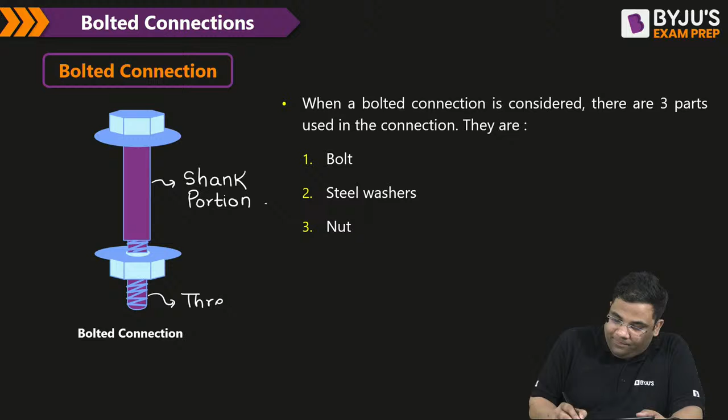This is known as the threaded portion. This is known as the head of the bolt. And you can see that below the head, here we have the washers. They are known as the washers. And then we have this nut.

So how is bolting done? Very simple. Suppose we have two members like this. So what we do? First of all, we'll make a hole and then we'll place the bolt like this. This will be your shank portion, and then it will be the threaded portion. Okay, and then this is the head. Then here we'll place the washer first. This is the washer.

This is to hold the members, and then we will place the nut and tighten it. So this is a typical bolt. Now first of all, let us see some specifications about the bolt.

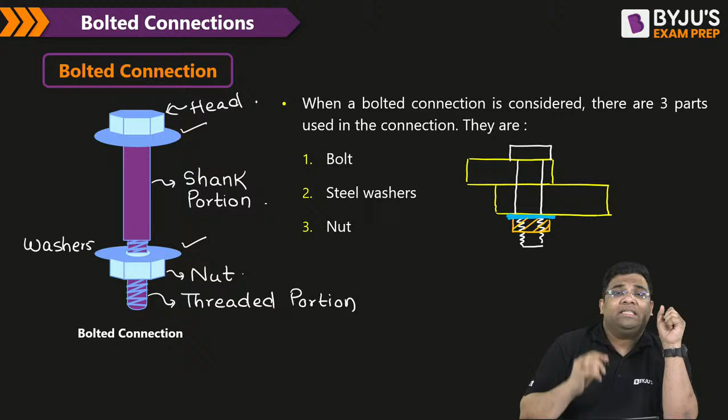Let us see some specifications about the bolt. The first specification is the grade of bolt. When we are writing grade of bolt, it is expressed in this manner, either like 4.6 or 8.8, something like this.

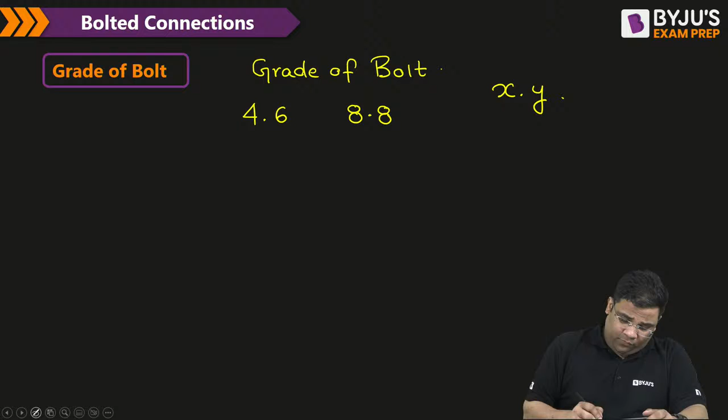Now this is in the format x dot y. Now what this x is, what this y is, let us understand. If you multiply 100 to this x, we will get the ultimate strength of bolt.

Now bolts are prepared from steel. And we know that if we draw the stress versus strain curve of steel, then we get a curve something like this. Initially there will be a straight portion and then something like this. This is the stress versus strain curve of steel.

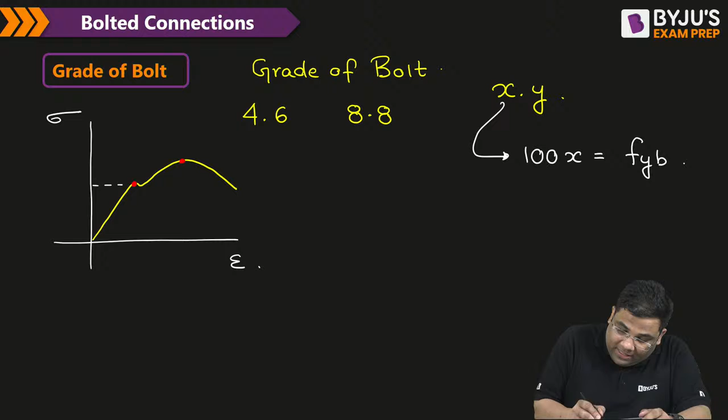Here you can see we have two important points. One point is this, one point is this. Now this point is the yield stress. And this point is the ultimate stress.

So this is, I can say, what will Fy be? I can say this is the yield stress, or I can say yield strength. You can say this is the yield strength of bolt, FYB.

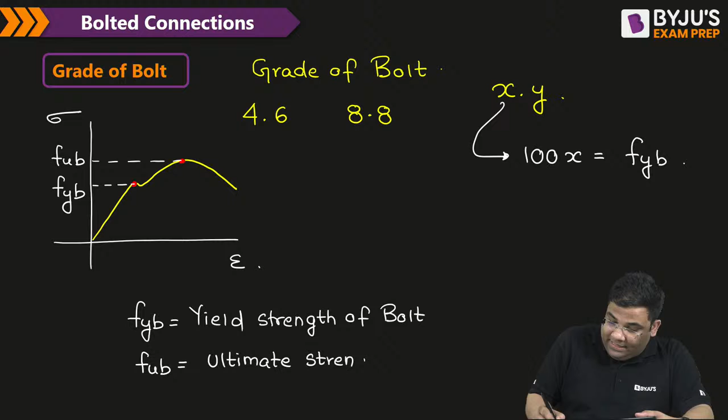And what is FUB? FUB will be the ultimate strength of bolt. So if you multiply 100 with x, we get FUB. This x indicates a number. When you multiply it by 100, you get the ultimate strength of bolt.

So tell me, when I am telling 4.6 grade, what is the ultimate strength of this bolt? Can somebody tell me? Can you mention in the comment section what will be the ultimate strength of this bolt? FUB, when it is written 4.6, tell me, what will be your answer?

Yes, it is 400. You see, in this 4.6, we can say x is 4. So what you do? 4 into 100 gives me 400 Newton per mm square. This is the way we find out the ultimate strength of a bolt from its grade.

Now, what does this 0.6 indicate? Let us understand. This point y is the ratio of the yield strength of bolt and the ultimate strength of bolt. So when I write point y, it is the ratio of yield strength of bolt and ultimate strength of bolt.

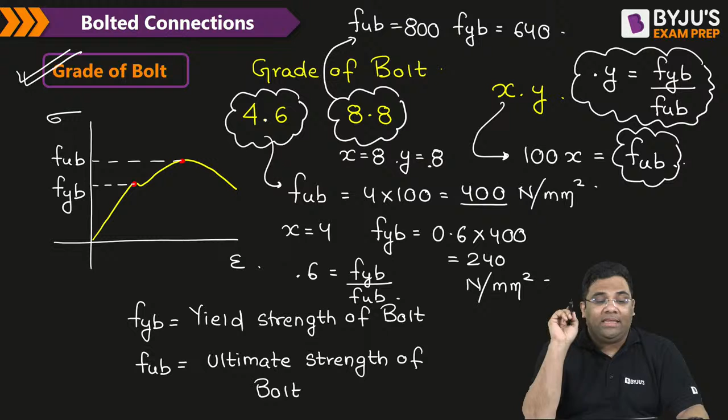Very good. Next thing is the diameter of a bolt. Here you see, we have seen that this is the shank portion and this is the threaded portion. The shank portion is also known as the gross portion, the gross area, and this threaded portion is known as net area.

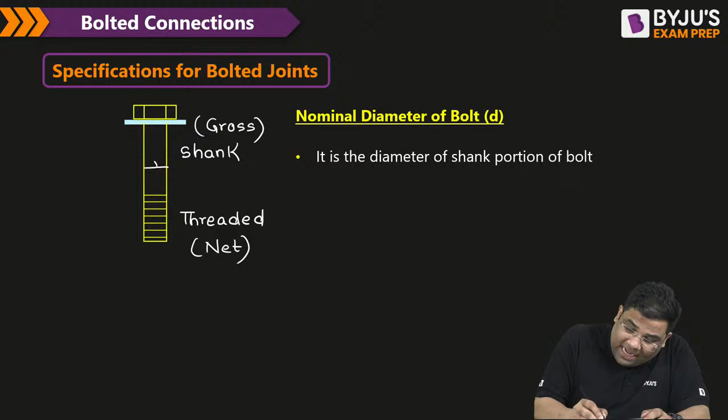The nominal diameter of a bolt is the shank diameter. From here, I can find out the shank area of the bolt. In your steel subject, there are so many terminologies.

How do we write down the names? Very easy. A stands for area. Now which area? Shank, S. So I write shank area

of bolt. And it will be how much? The bolt cross section will be circular, so it will be pi by 4 into d square.

Now tell me, where will the area be more - in the shank portion, the threaded portion, or the net portion?

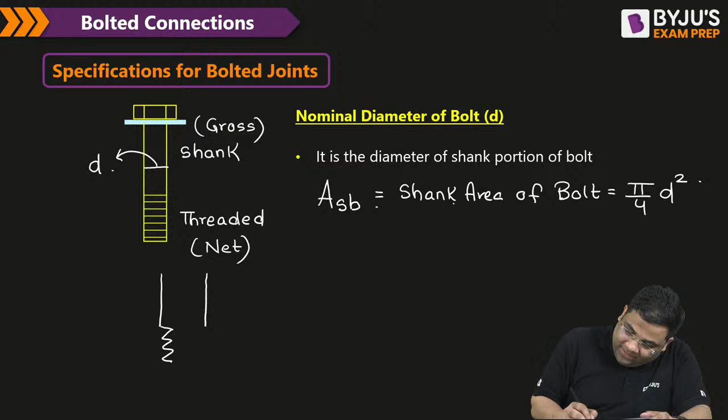Shank portion, yes. We can see that if we redraw it - I am just redrawing it, it will be something like this. I am not drawing the head. You can see that this is D. So shank area will be more.

As per our IS code, the net area of bolt is 0.78 times the shank area of bolt. This you have to remember, and this is as per IS 800, the code for steel.

So this thing you have to remember. The net area of bolt will be 0.78 times the shank area, or 0.78 times pi by 4 into d square. So this we understood - the nominal diameter of the bolt.

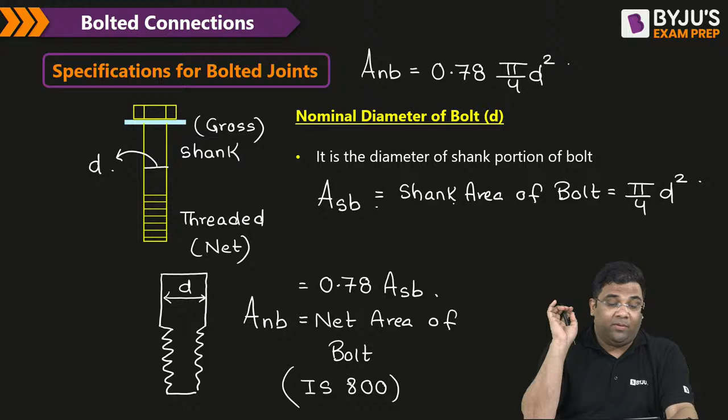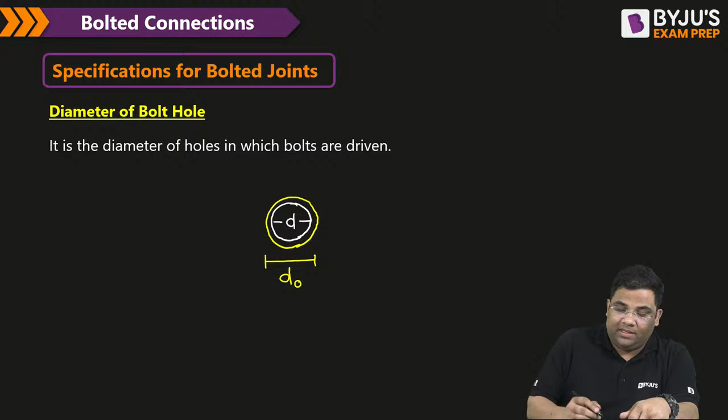Now the bolts will go inside the bolt hole. Suppose this is the cross section of a bolt, diameter d, which will go inside a bolt hole. So obviously the diameter of the hole should be larger. I will call that as d naught. Obviously d naught will be greater than d.

I can say d naught will be d plus some clearance. Now how to find out that clearance? That will depend on the diameter of the bolt.

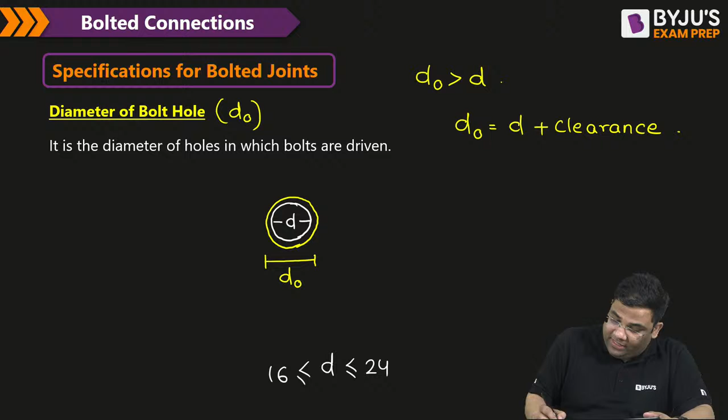So to remember it: if the diameter is between 16 and 24, including 16 and 24 mm, then this clearance value is 2 mm. When the diameter is less than 16, this clearance value is 1 mm.

And when the diameter is greater than 24 mm, this clearance is 3 mm. So I can say the hole diameter is equal to the bolt diameter plus 1, or equal to bolt diameter plus 2, or bolt diameter plus 3, depending on the diameter of the bolt. This is for where the diameter of the bolt is between 16 and 24.

You can remember this much only. If you remember 16 to 24, you remember the other things also - where D is less than 16, and where D is greater than 24 mm.

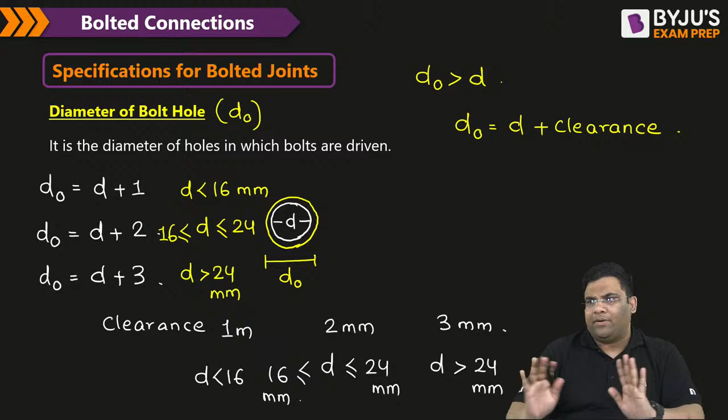So now tell me, for 12 mm, if the bolt diameter is 12 mm, what will be the hole diameter? Fill in these blanks: for 12 mm it will be 13, for 14 mm it will be 15, for 16 mm it will be 18, for 18 it will be 20, then 22, 24, 26, for 27 mm it will be 30, then 33 and 36.

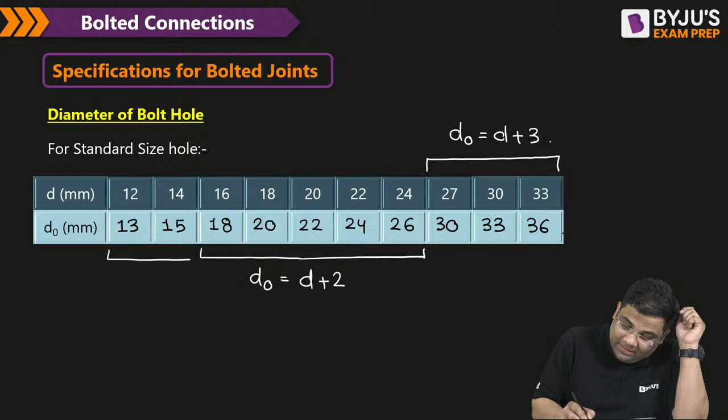So you can see that when it is above 24, the D naught will be what? D plus 3. Yes. When it is between 16 to 24, it will be what? D naught is equal to D plus 2. Yes. And when it is less than 16, I can say your D naught is equal to D plus 1. So everyone understood this, right? Everybody understood this. So the next specification, that is what?

The pitch distance. Now what is pitch distance? You can see these are the bolts, right? The pitch distance is the consecutive distance between the bolts. This is the pitch distance. Or I can say center to center distance between the bolts.

Okay. But this is center to center. Even this is also center to center, right? This is also center to center. But which one is the pitch? Remember that this is center to center distance in the direction of load. You can see that the load is applied in this manner, right? So it is in the direction of load.

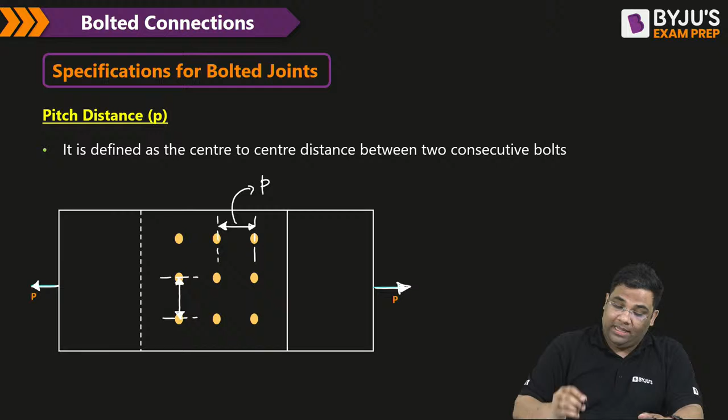Direction of load. Okay. This is known as what? Gauge length. Gauge length is what? It is perpendicular to direction of load. Very simple concepts. So I can say that both pitch and gauge length are the center to center distance between consecutive bolts.

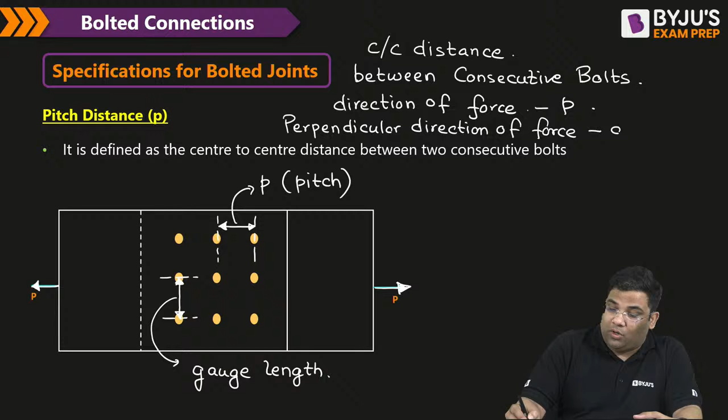But when it is in the direction of load or direction of force, then I will call this as the pitch. And when it is perpendicular to direction of force, then it is the gauge length. Understood? Now, there are certain specifications about the pitch distance.

So the minimum pitch distance is equal to, remember this, 2.5 times of the bolt diameter. You have to remember these things. Small things. We'll solve questions also. Don't worry. Have little patience. The minimum pitch is 2.5 times of the bolt diameter. Very good. Very nice.

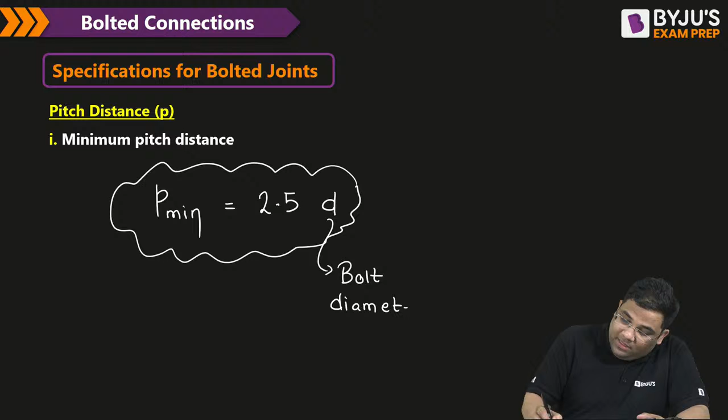Now don't confuse. Some students get confused whether it is bolt diameter or hole diameter. It is bolt diameter. This is D, your bolt diameter. Then what about the maximum pitch? The maximum pitch depends on whether it is a tension member or a compression member. Suppose there is a member and there is axial tension acting. Then it's a tension member.

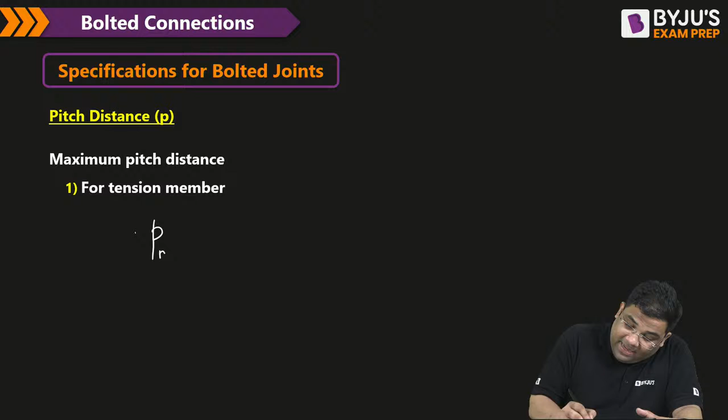In that case, the maximum pitch is equal to 16T or 200 mm, whichever is minimum. Whichever is minimum, we take that as the maximum pitch. Okay, and what is this T? We'll be connecting two members. Suppose I'm connecting two plates here, something like this.

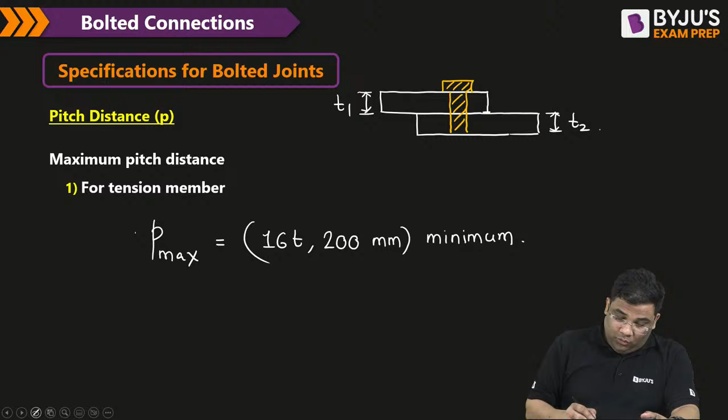Now suppose this is your T1 thickness, and this is your T2 thickness. And I have connected this through bolts. So here in this equation, T is the minimum of T1 and T2. Very good, easy. Understood everybody? So I can say thickness of the thinner plate.

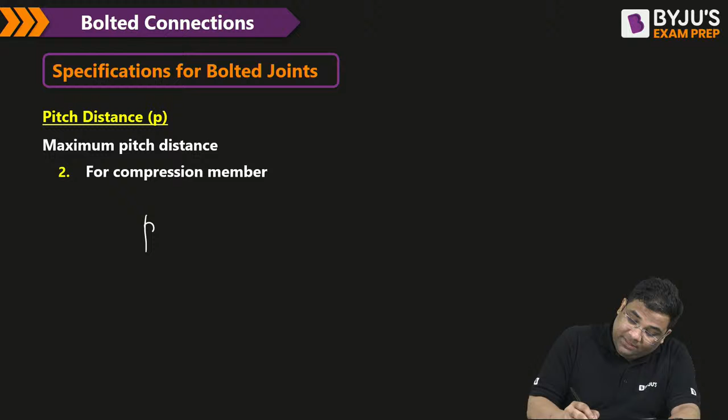This is the maximum pitch. Now this is for a tension member. For a compression member, this maximum pitch will be equal to, instead of 16T, what? 12T and 200, whichever is minimum.

For example, if I say that this T1 is suppose 12 mm and this T2 is suppose 16 mm. Suppose this is there, and I'm asking you, what is the maximum pitch? What will be the answer? Tell me. Suppose it's a tension member, and tension is acting like this. So tell me, in this case, what will be the maximum pitch?

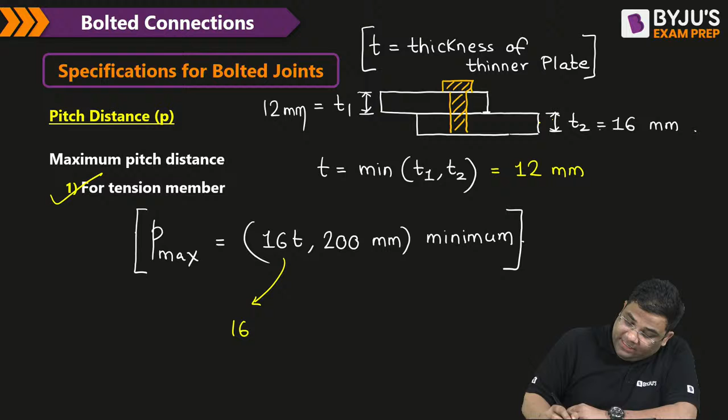Here take the thinner member. So T will become 12 mm. And then we will take 16T: 16 into 12, that is 192. So we will compare 192 and 200. Which is minimum? Minimum is 192. So here the answer will become 192. Understood? So like this, you should be able to find out the maximum pitch distance.

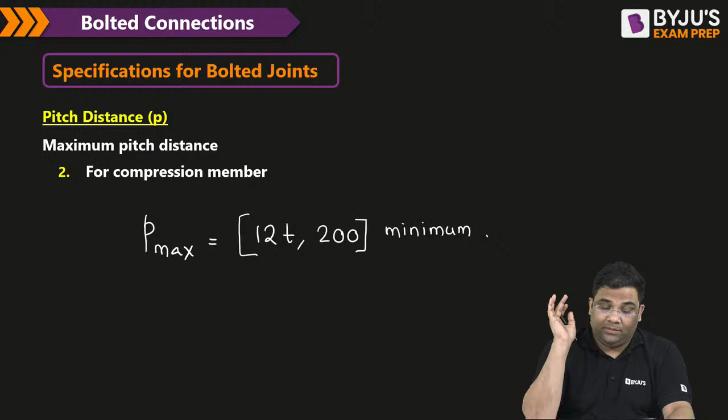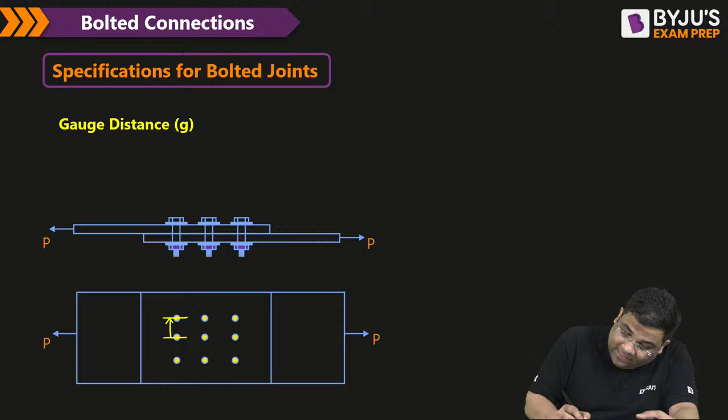And this is for the compression member. The difference between tension member and compression member is, the tension member is 16T, the compression member is 12T only. Yes, very good. Now next is gauge distance. The gauge distance we have already discussed, right? It is the center to center distance between consecutive bolts in the direction perpendicular to the load.

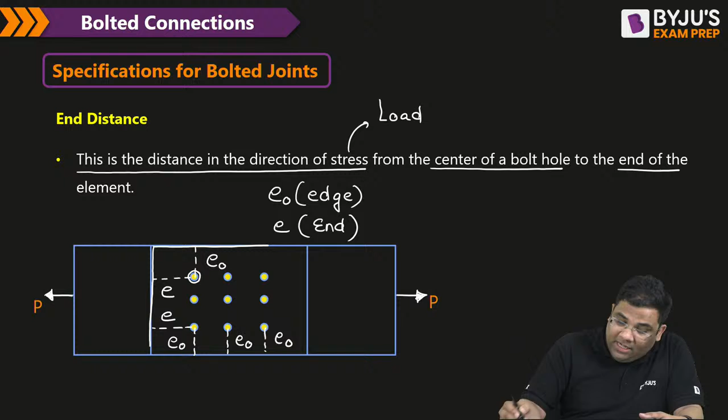Now how to know which is end, which is edge? This end distance is in the direction of load. This is also end distance; it is in the direction of load. Whereas this edge distance, all these are edge distances, in the direction perpendicular to load. So the end distance is the distance in the direction of stress or load, from the center of the bolt hole to the end of the element, or member.

And what is your edge distance? All these are edge distances. This is the distance perpendicular to the direction of load. Understand everyone?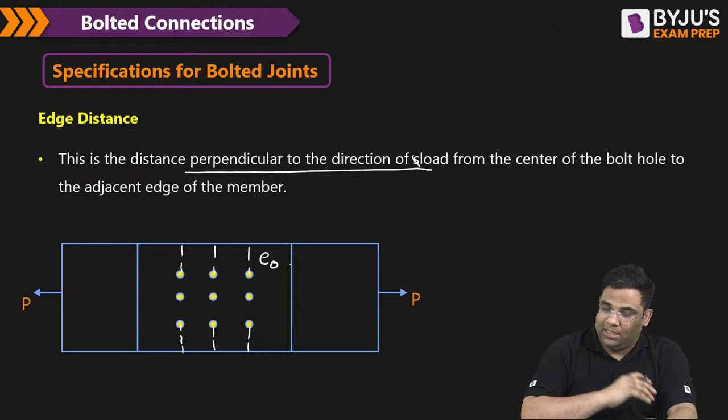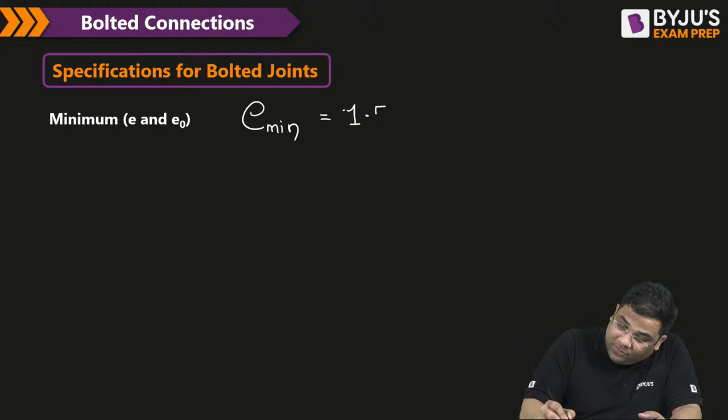Next we'll go to the specification for bolted joint, minimum end distance or edge distance. The specifications are same. It is equal to 1.5 times the hole diameter if you are making the holes by machine, so machine cut. It's equal to 1.7 times the hole diameter if we have hand cut. Nowadays machine cuts are used, yes or no? So by default this is the minimum end distance or edge distance.

So now ladies and gentlemen, one small point I want to mention here. If you remember, what was the minimum pitch distance? The minimum pitch distance was 2.5 times D.

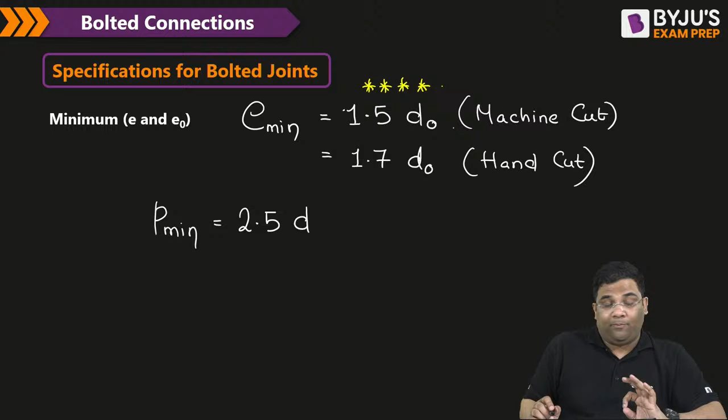So here students get confused, therefore I want to tell both of the points together: the minimum pitch is 2.5 times of d, where d is the bolt diameter. Whereas the minimum end distance or edge distance is 1.5 times of d naught, where d naught is the hole diameter. So these 2 points I want to mention together because students get confused in this. Hope it is clear now.

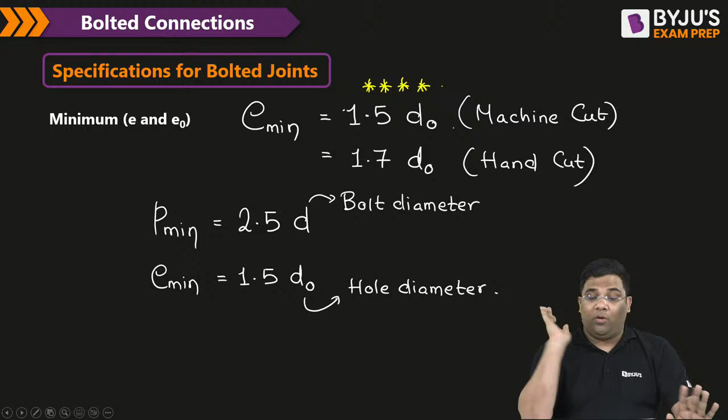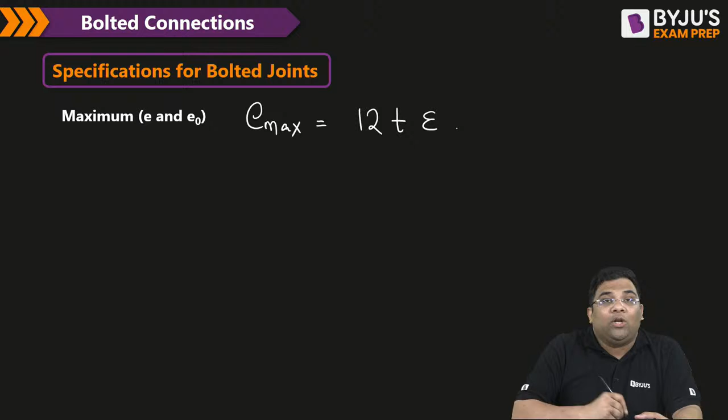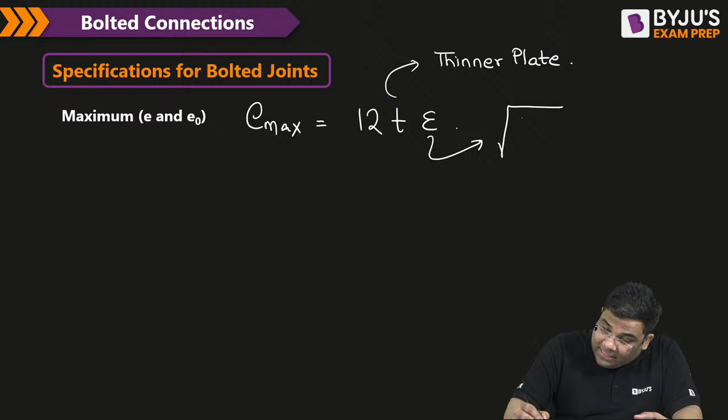Now what about the maximum end distance or edge distance? The maximum edge distance or end distance is 12 t epsilon. What is this t? This t is the thinner plate, the thinner plate or thinner member. And what is this epsilon? This epsilon is root of 250 by Fy, where Fy belongs to the plate.

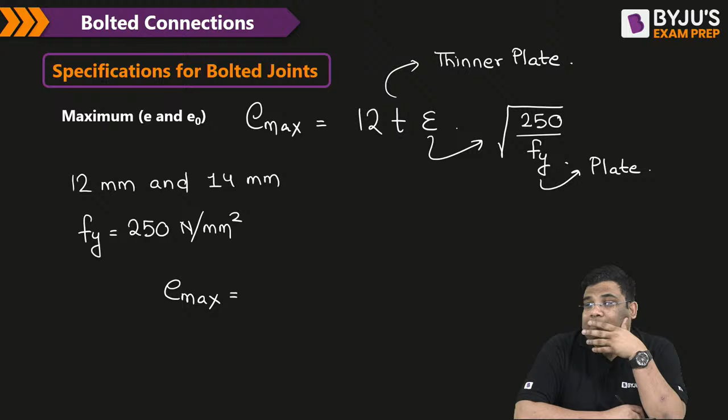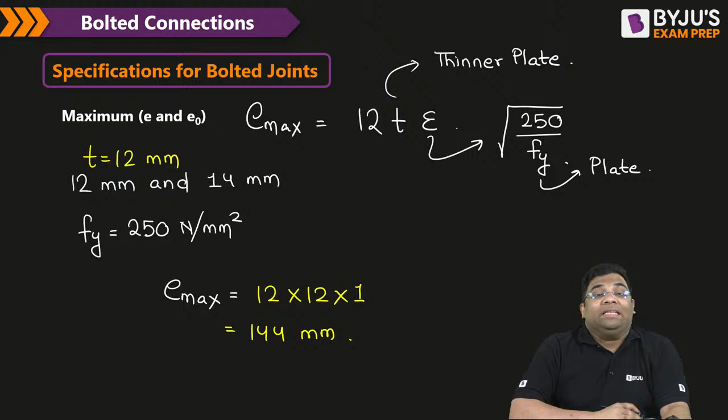For example, if I'm saying that I'm connecting two plates, 12 mm and 14 mm, and suppose Fy is 250 MPa only. Now tell me, what will be the maximum edge distance in this case? Yes, it will be what? You see, 12. The thinner plate is 12 mm, right? So 12 into 12, and epsilon will be 1. So the answer is 144 mm.

Why have I written that? Sorry, 2.5, sorry. 2.5, the answer is how much? 45. Understood? Very simple, very easy.